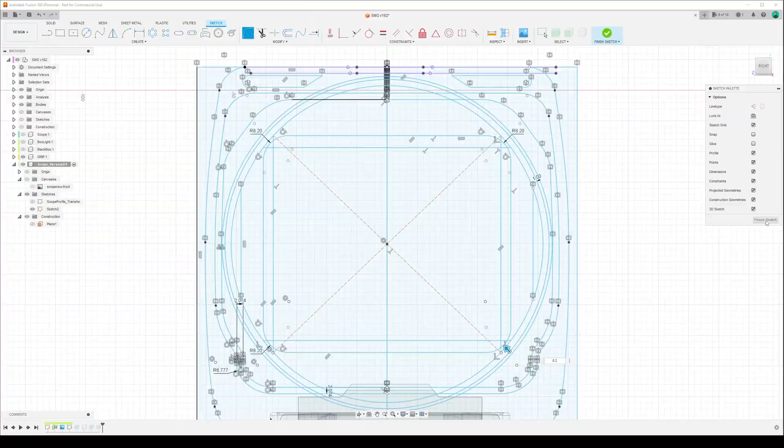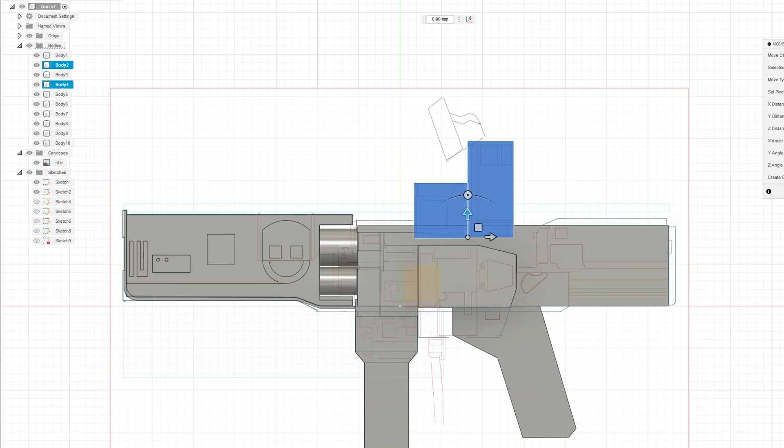Art takes so much time. It takes so much work. I've been on my artistic journey now for 20 years. In some of those years, I made great strides, and in other years, my progress slowed to a trickle. Some years I gave up on it completely. But you know what? Every year, you just try and get a little bit better.

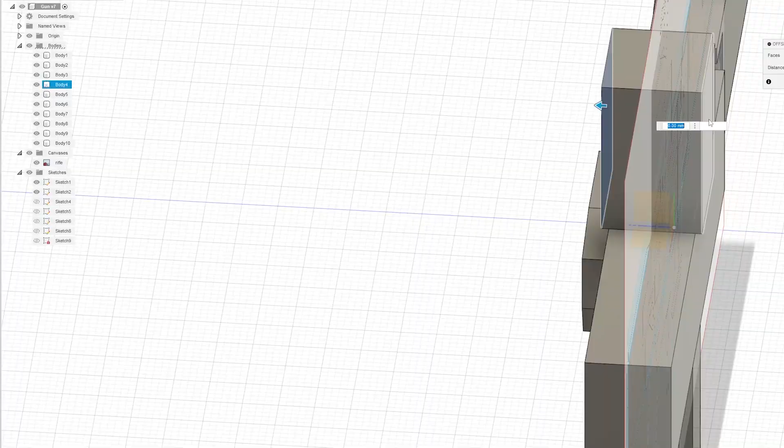There's a great line from the movie Life as a House, where one of the characters says, "Change can be so constant that you don't even feel the difference until there is one. It can be so slow that you don't even notice that your life is better or worse until it is. Or it can just blow you away and make you something different in an instant."

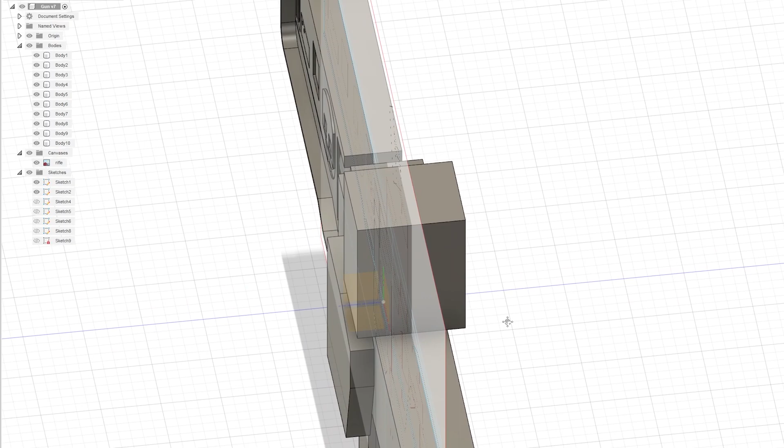That's definitely happened for me. One of the most fun things about being an artist is watching yourself get better, looking at your old work, having this record of time through your work and seeing yourself and how you evolved and what you were thinking.

In today's video, I'm going to show you my latest personal project, which I'm calling the Cybernetic SMG. It's based on concept art by Yin-Tian Jay, one of my favorite concept artists in the business. I think he does really refreshing, unique concepts, just really interesting stuff.

But his stuff is complex, pretty heavy. He's an incredible draftsman. He does a lot of photo bashing, and I'll even talk about how I broke down his concept art. But I just really love his work, and I'm inspired to do it, and it's challenging. It's honestly challenging to convert to 3D.

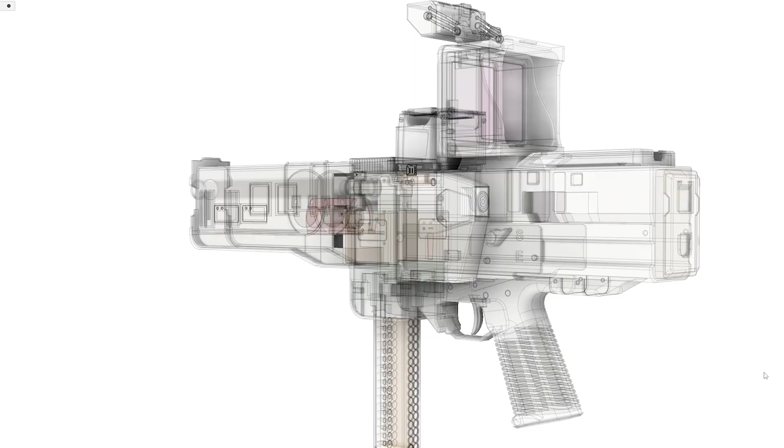Last summer, I embarked on a mission to learn Fusion 360, which is a CAD modeling program. And I've always wanted to learn Fusion 360, but it was always kind of daunting and I never really found the right project for it.

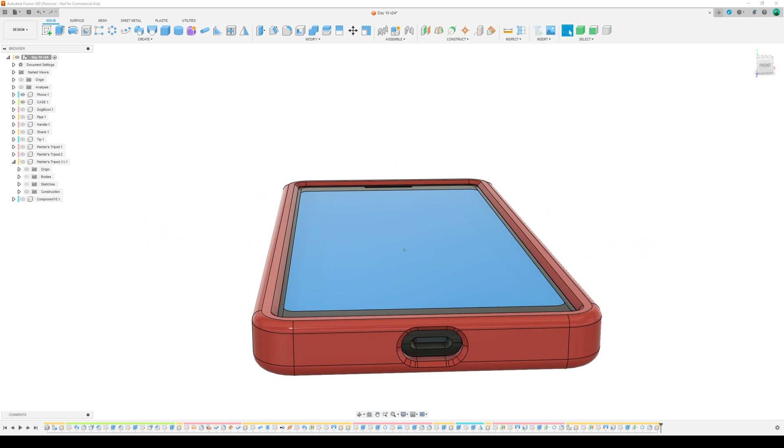One of the key benefits of Fusion 360 is that it's parametric modeling, which is to say you can draft the shape, extrude that into a 3D object, but then you can always go back in time and manipulate that object further. So it's very flexible. You can go back in the past, modify something to affect the future.

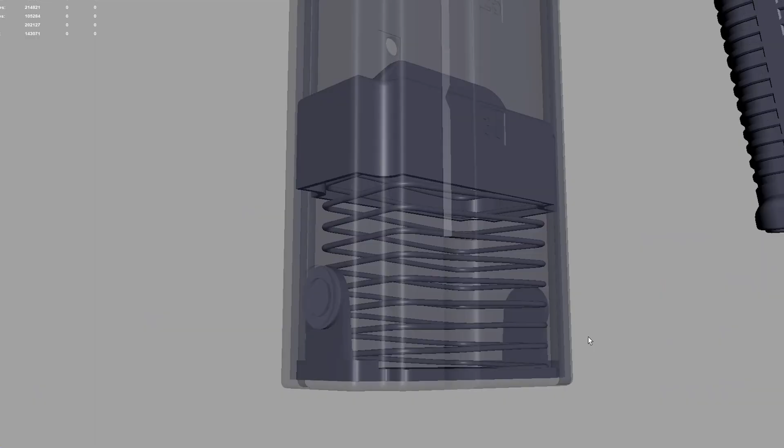It's non-destructive. So today's video is not intended to be a tutorial in the traditional sense. I'm not going to tell you every button to click to get this result. Really, it's just going to be a project story. I'm going to tell you what I was thinking, some of the struggles I faced, and also I will provide a couple tips, a couple things.

You ideally want to start with some kind of schematic, some kind of 2D drawing to help you trace. Overall, the design itself is relatively simple, and I thought that was the appropriate skill level for me, having just come into Fusion 360.

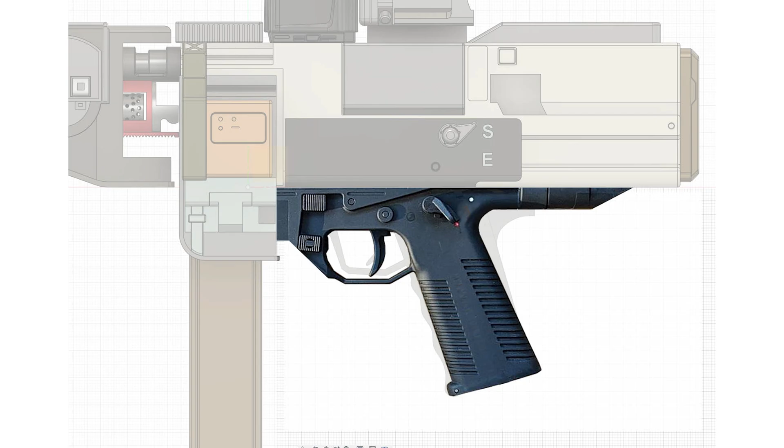But the concept doesn't tell you everything, and this is one of the fun parts about being a 3D modeler, is that you get to kind of fill in the gaps of the things that are not there. I had to go and do some digging into what these things were that I'm looking at, because obviously I can tell that it's photo bashed, but there are some elements there that are very clearly unique.

The concept itself is not a typical gun. I don't really know much about guns, but even I know that the stuff at the top, the attachments that usually have the Picatinny rail that you add attachments on, is not present in this drawing. And I partly assumed that was because it was kind of more of a sci-fi concept.

For example, even like screws, I wasn't going to put screws on this gun because they almost feel a little bit too contemporary. And I didn't want to place the gun in a specific time. Another thing that struck me as unusual is it's got this little battery box in front of the sight. So that kind of renders the sight completely useless.

And quite clearly, this gun has a bunch of different materials. I don't think there's one unified metal across the entire thing, or polymer. Even though I have this concept, I still needed to find more references that I could then draw on for more detail or form. So I had to figure out what these components actually were, or find something similar.

I was actually quite successful in finding the exact references that were used in this image. For example, in one of my gamer discords, somebody just linked this gun review channel called Forgotten Weapons. And what do I see on the homepage but the exact weapon that I was looking for? The H&K G11, German made. Looks like it's something straight out of Starship Troopers or RoboCop. It has an extremely unique look.

So right away I was like, oh my god, it's the gun that was used in the concept. And one of the coolest parts I learned is that the details on the gun are inverted in the concept. It was flipped. So it was incredible to find this exact reference to get a sense of the materials, the scratches, the textures.

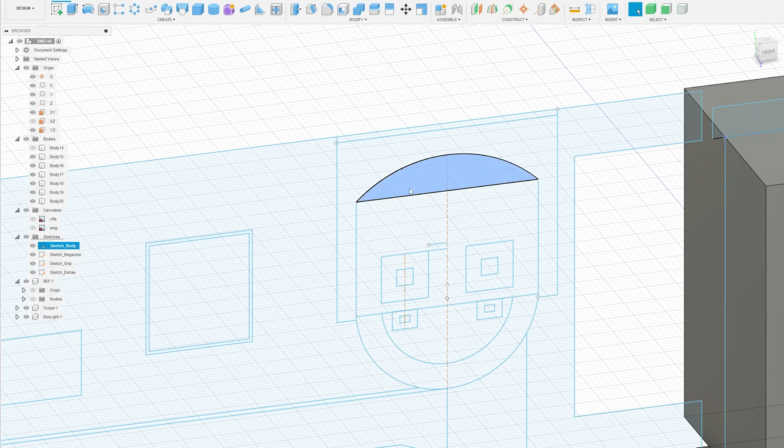Finally it was time to actually start making the model in Fusion 360. Fusion 360 made modeling fun - it was just pure fun because you're not worrying about all the technical stuff, you're really just thinking about how do I make this look like what I want it to look like. For a little while there, it actually revived my interest in 3D, period.

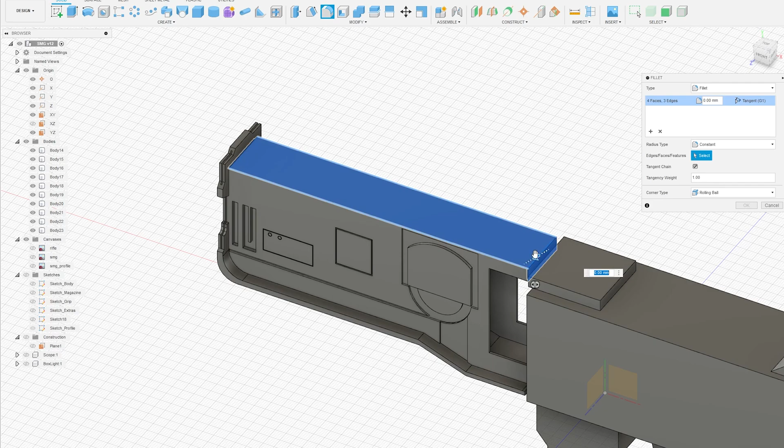The parametric workflow is so forgiving. You can put a little hole for a screw in a gun and then decide, I actually want to move it over here, and it just updates dynamically. It's so beautiful - you don't have to worry about polygons or anything.

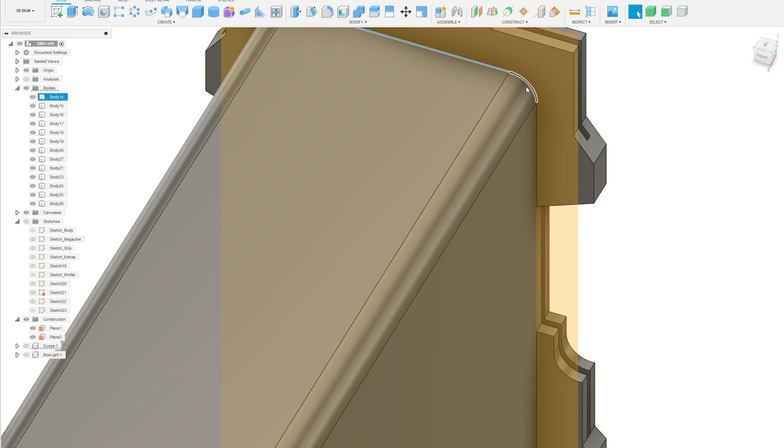So I can see why this is used for weapons and game design, because it's so forgiving, a lot of flexibility, and you can make modifications quite easily. The hard part about CAD is when you have to convert this to polygons, and that's a whole other part we're going to get to. CAD to polygons for games is not the easiest thing, to the point where I'm not even sure I'd do everything in Fusion 360 down the road. I do think typical standard polygon modeling or ZBrush modeling is still ultimately faster, but it's nice to have Fusion 360 in your pocket because it's excellent at other things.

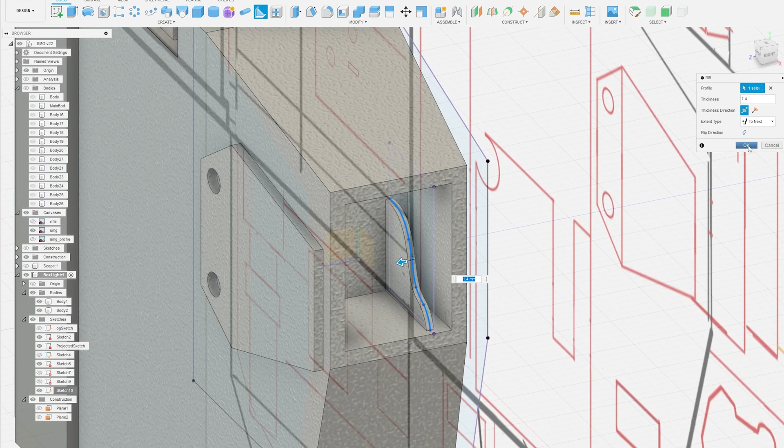So yeah, I was deep into Fusion 360 for a while. I even picked up a 3D mouse because I wanted to see if it would improve productivity or make it easier to work with. Ultimately, no, it's not - I think a mouse and keyboard is easier to use.

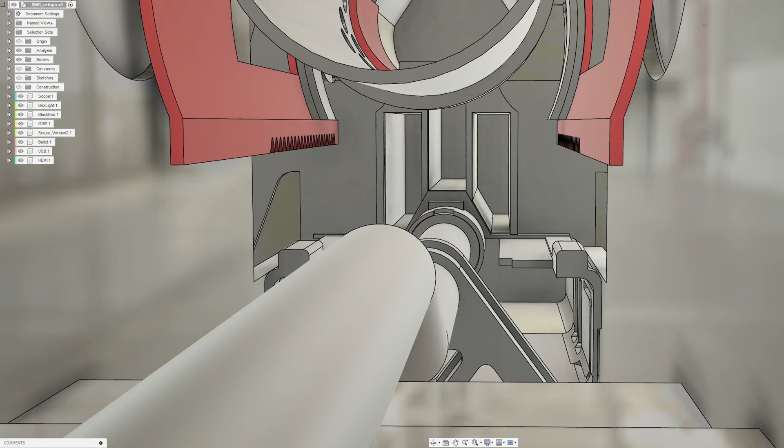However, it does allow you to do this sick thing where you can fly around the model in all directions at the same time, so that part's really cool. I think it's really cool for videos or demonstration purposes, but for actually working I prefer to have the full range of keybinds by just using a keyboard.

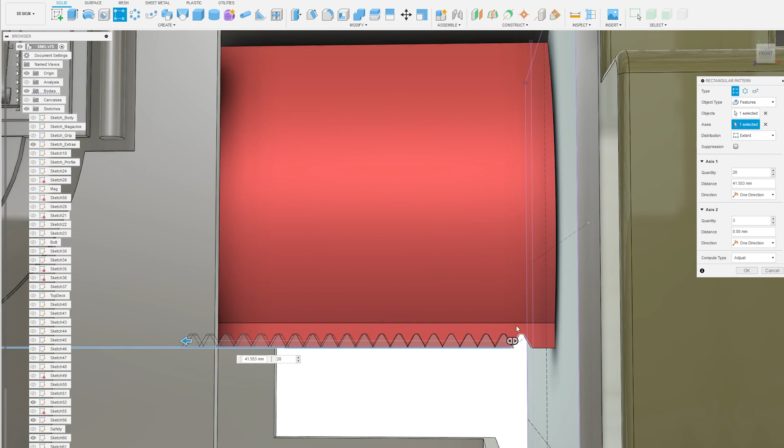So hopefully you can appreciate that bevels are easy, patterns are easy, booleans are easy. My personal favorite feature is the pattern tools, which allow you to repeat an extrusion or a boolean, just as I'm doing on this inner tube. This would be a perfect example of something that would be so messy to do with polygons - you can do it with booleans and everything, but it's just messy.

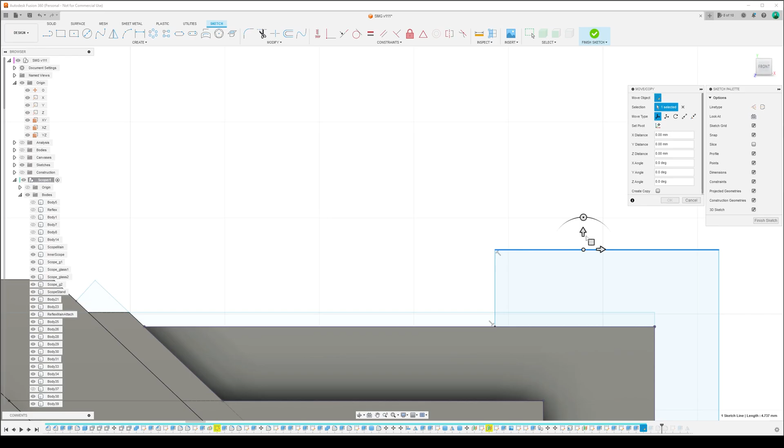The only critique I'd have in CAD is it's a little harder to work in multiple dimensions at the same time. CAD would much rather work orthographically, looking straight on front, side, top, or bottom view, but it's not great at crossing those dimensions at the same time. For example, if you had a diagonal piece that also happened to curve in space perpendicularly, ZBrush is actually the perfect counter to that problem.

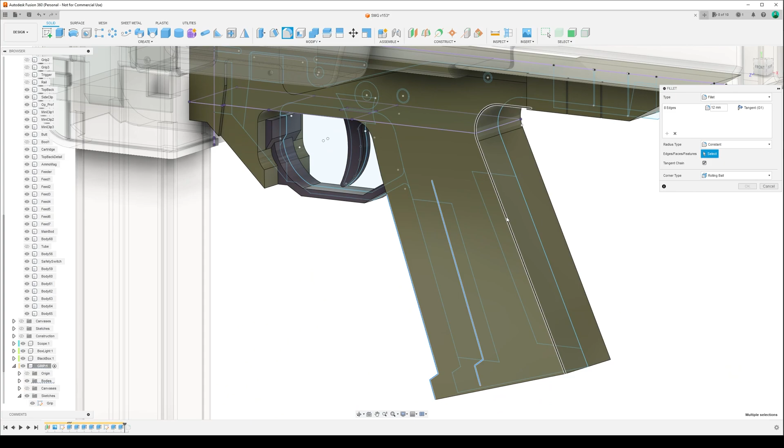But there's really not much else to say. Honestly, anybody can pick this up and start 3D modeling. You don't need to know anything about 3D, you don't really need to know anything about polygons or topology. It just doesn't matter in this CAD environment.

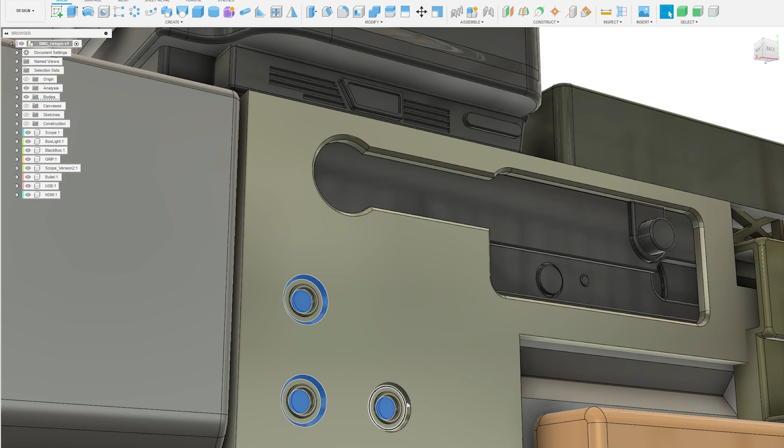I did experiment with removing some of the detail from the high poly version of the CAD model so I could bake those details in instead. However, the bake just didn't look as good as having it modeled into the geometry, especially when you see it at an angle. There's a perspective shift that a normal map simply can't accomplish.

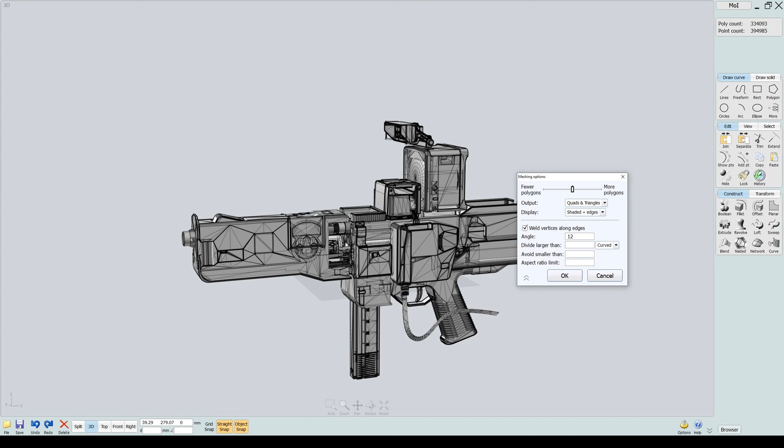360 does have tools to export the model to FBX or OBJ directly to get it into mesh, but Moi 3D is still, in my opinion, a better tool because you can get way more control over the poly count. Moi 3D is another CAD modeling program. I picked this up years ago, back in the day when I was experimenting with CAD. The other one people are using today is called Plasticity, but I have Moi 3D, so I use that to convert the CAD model to polygons.

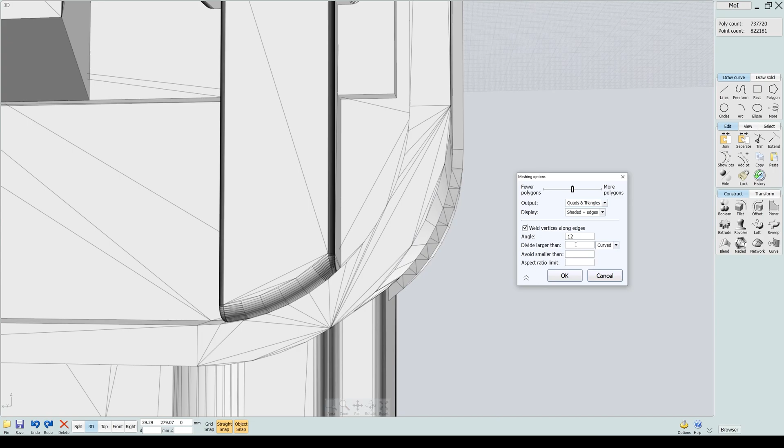And it's great because you can play with the level of detail, the poly count, directly in this. Now, I wouldn't use the model that it spits out directly from Moi. I think it's too high poly or too low poly. You need to kind of find an in-between.

When you convert a CAD model into regular polygon geometry out of Moi, you have a few export options, one of them being Ngons, and Ngons is a lot cleaner. It converts all these fillets into patches, so typically if you were choosing curves, this would be kind of like how curves work. Obviously you can see this doesn't work here, right?

This produces a whole bunch of Ngons that I am cleaning up, and that's part of the only reason why this retopology is taking forever. But I'm just going to show you my technique for how I clean this up.

So obviously first you just want to select the problem area, and I want to extract these faces. You could just use shift right click, extract faces, Maya's default. However, if you notice, when you use the extract tool in Maya it creates a bunch of groups and also an empty transform node, and it just makes everything messy, and I don't want that.

Instead, I'm going to use Malcolm 341's Megapack scripts. It's got one in here called extract, and if you click it right here, as you can see, it creates no subgroups and keeps the outliner nice and clean. I just really like this bunch of scripts here. So I'm just simply extracting these faces.

The next thing I'm going to do is delete these unnecessary verts because we just don't need these, and this is what's creating the n-gons. Okay, nice and clean. And next we're just going to delete these unnecessary edges that don't go anywhere.

By doing that, we're now able to insert edge loops, hopefully across each side, okay? But by holding shift as you use insert edge loop, it's going to preserve some of that curvature. That's called edge flow. It's adding a little bit of edge flow to each one.